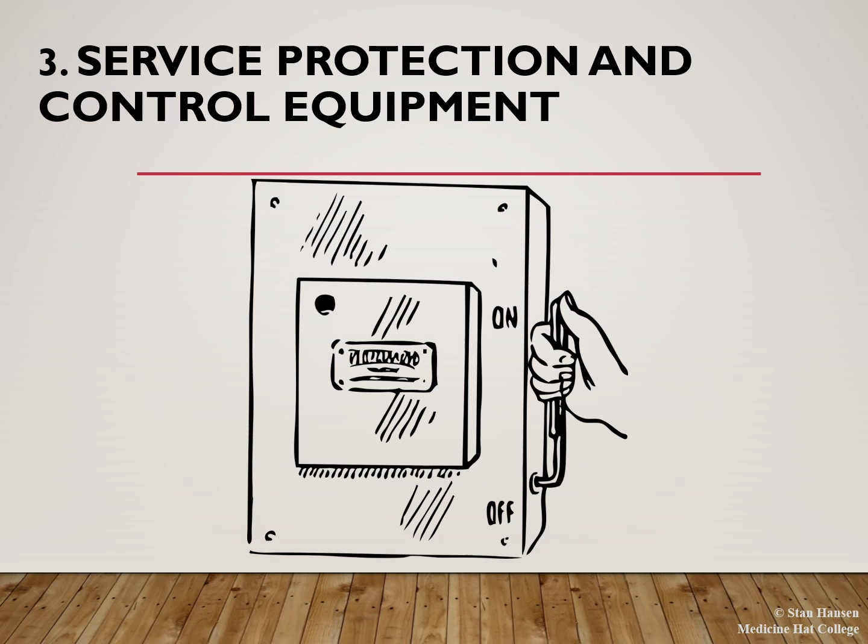Where we place our service equipment is very important because we need to be able to work on it comfortably and safely, and we need to make sure that there's enough access to be able to get to it. So there's a few different rules we have to look at. First of all, let's look at Rule 6-206, which states that wherever we put our equipment has to be approved by the supply authority. So whoever is supplying the power to the building has a say on where we put our equipment. Rule 2-26 also states that the inspector has power of rejection if they're not happy.

So not only do we need to make sure that the supply authority is happy, we need to make sure the inspection department is happy as well. Normally, this is achieved when we submit our drawings into the city or the supply authority for approval in the first place. A few other things we need to think about is it must be readily accessible. It has to be located as close as practicable to where the conductor enters the building.

Standata actually limits the length of the service conductor to 3 meters from where it enters the building to where it enters the service box. If we can't make that happen, we can go up to 7.5 meters, but then we have to protect it with rigid steel conduit. Some of the other undesirable locations to think about are things like closets, bathrooms, stairwells, or anything else that's considered to be dangerous or hazardous locations. So think about it this way. If you don't want to work there, don't put the panel there.

We also need to make sure that if any rooms are going to be hotter than 30-degree ambient temperature, that's not a good place for service equipment and it's not allowed. Also be aware of the flood zones inside your city because that changes how we install our service boxes as well.

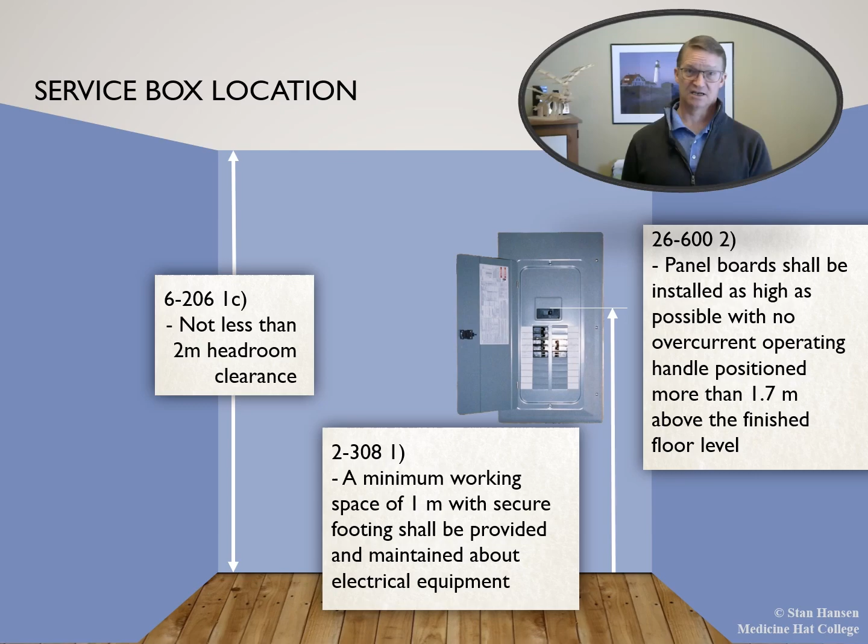Let's take a closer look at Rule 6-206, Subrule 1(v), which states that we cannot locate our service box in any areas that are below the floodplain elevation. Places like Medicine Hat tend to flood every once in a while, and the City of Medicine Hat actually has a flood elevation map available on their website that tells you what the elevation of that flood zone is going to be. We have to make sure that wherever our service boxes go are not below that floodplain elevation.

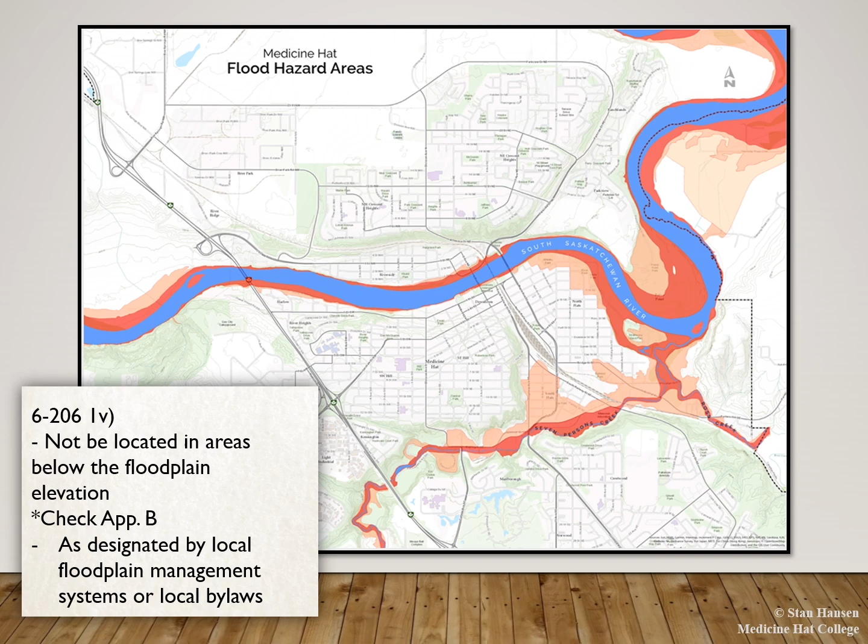What we can typically do is use a combination meter base. This will have the meter base on top and a service box directly below it, and we can mount this on the exterior of the building to make sure that our service box is not below the floodplain elevation. This way, in case of a flood, we can easily turn off the service box without having to go into the basement and risk ourselves.

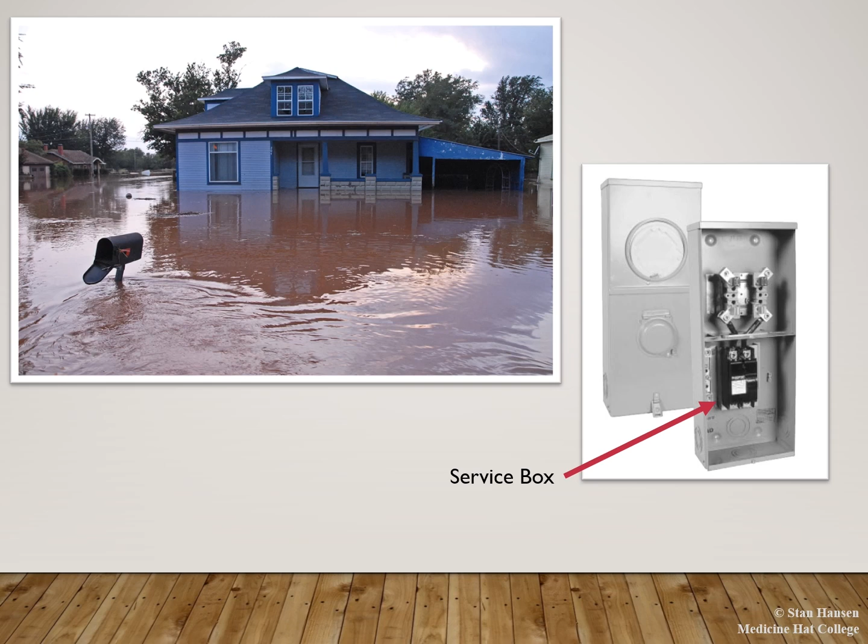When it comes to the rating of our service equipment, we have to be aware of a couple different things. First of all, we already discussed how to use Rule 8-200 to size our service conductor, and then we use our service conductor ampacity to select our overcurrent device. We would also be using our service conductor ampacity to select our service equipment ratings.

When it comes to a combination panel board, the bus bars inside that panel board are considered to be an extension of the consumer service conductors. So therefore, their ampacity cannot be any less than the ampacity of the conductors themselves. It's interesting to note that most 100 amp panels have bus bars that are rated at 125 amps in order to facilitate this rule.

Now that we looked at where we can place our service equipment, we're going to look at two different styles of services and what rules affect them. Overhead services are supplied from a transformer mounted on a pole, and the supply service will go through the air to connect to the consumer service. There are times where we can transition from a pole service to an underground service, but it's not always feasible and it's usually an extra cost.

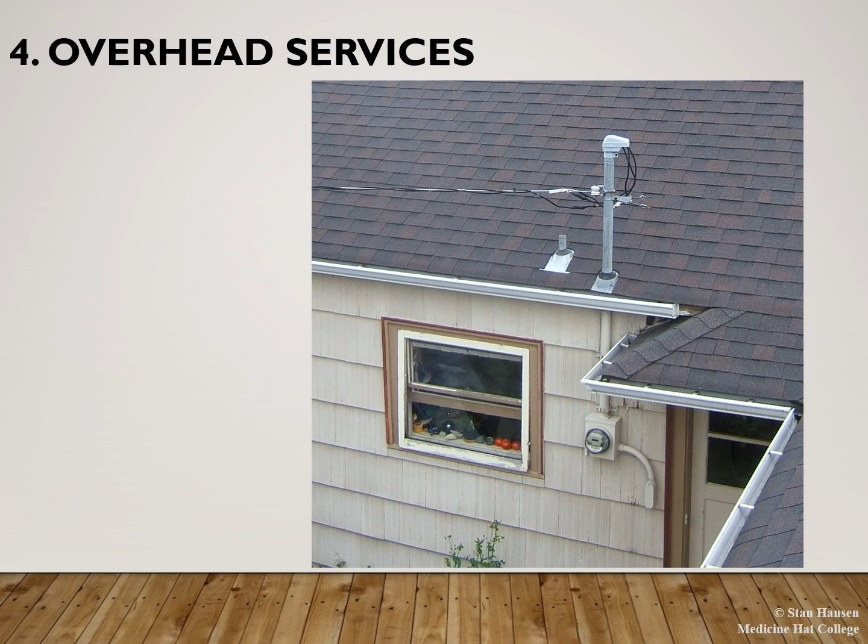The main concern that we have with an overhead service is maintaining a safe clearance for the conductors. We have to pay attention to Rule 6-112 Sub-Rule 2, which gives us some of the rules based on where to put the point of attachment compared to where we're going to put the service head.

6-112 states that the service conductors shall be attached to the building on the same side as where the service head is. So we can't be mounting it around the corner in case of an unmasted service. We also have to make sure that it is placed in such a way that the service conductors will run away from the building on an angle. So we cannot go over the corner of a building. And once again, it must be in compliance with the supply authority.

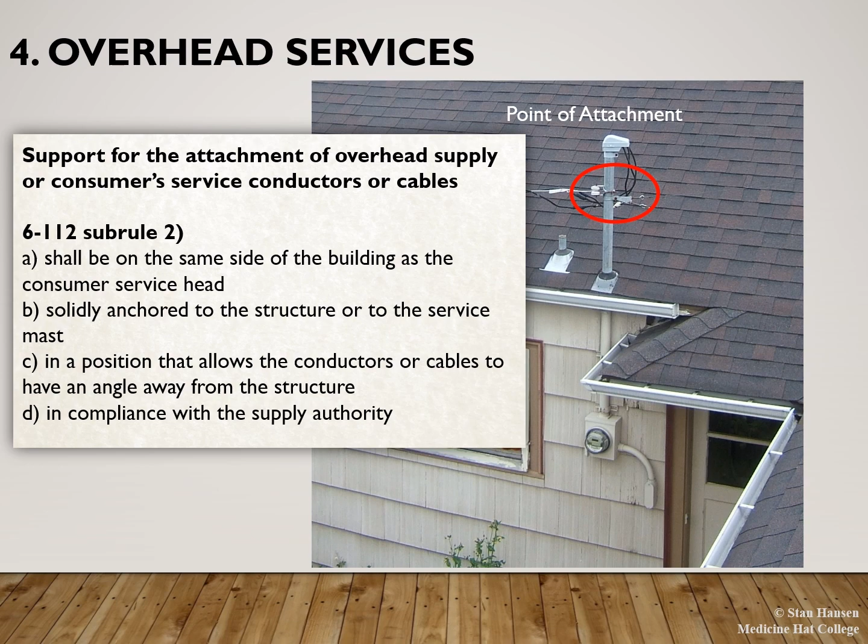Sub-Rule 3 deals with how much clearance we need to have between the cables themselves and the ground. And this all depends on what is going underneath the cables. So depending on what kind of vehicular traffic we have or what kind of obstacles could be found underneath it, it will change how much room that we need to have for clearance.

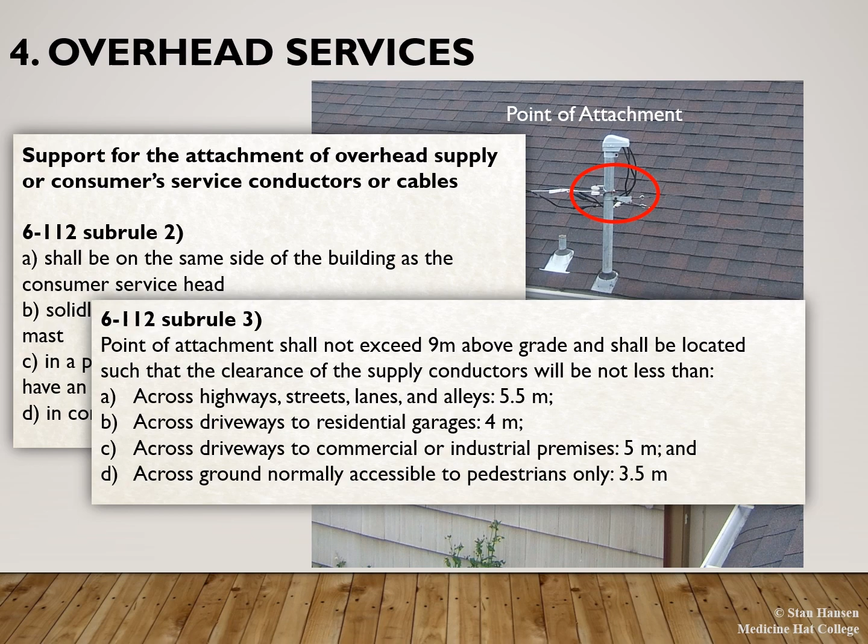For example, for highways, streets, and alleys, that's the most clearance we're going to need at 5.5 meters, whereas a pedestrian walkway would need the least amount of clearance at 3.5 meters. So depending on what your service is going to go over will change the amount of room that's required between the ground and the conductors themselves. These measurements all affect how high the point of attachment needs to be from the ground.

There's two types of overhead services that we can do. And the first type is called a masted service. We would use a masted service in case our service raceway ever has to go through a roof in order to meet the height requirements of Rule 6-112 Sub-Rule 3. The code book states that the raceway that we use in this condition must be rigid steel conduit of at least trade size 63.

The reason that we want to use rigid steel conduit is because we want to have that physical strength so that it can hold not only the weight of the conductors themselves, but any forces or load that are put on those conductors. The STANDATA allows us to use smaller than trade size 63 depending on the conditions of the installation. Remember that STANDATA is only used in Alberta, and it's because of environmental conditions in Alberta being different than other places like Ontario that we can actually have a smaller conduit size.

So STANDATA states that depending on how high we are going from our point of attachment to our roof line will change the size of the requirements for our rigid steel conduit. The higher we go, the larger our conduit has to be.

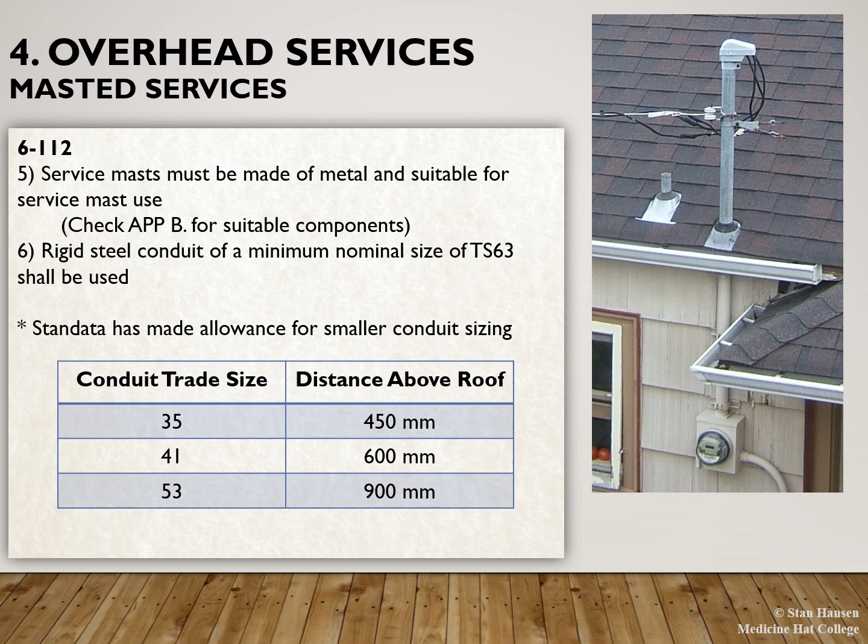We need to make sure that our masted services are solidly secured to the building. That means they have to be bolted through a piece of structure that's at least 38 millimeters thick. We could put in a 2x4 in order to support our mast, but that 2x4 must be part of the structure. We also need to make sure that we have 3 separate support clamps securing our mast: one right below the roof line, one right above the meter base, and then one between those 2 points. Make sure you're checking Appendix B on this rule to see all the different components that are required for a masted service.

The other type of overhead service that we have is an unmasted service. And this is where the height requirements do not require us to go through a roof line. We can bolt everything directly to the side of the wall of the building itself. This changes how we do a few things. First of all, our point of attachment is now going to be directly to the structure and not to our raceway like it was with our masted service.

Secondly, our raceway has more options. Instead of using a rigid steel conduit, we can use whatever we need as long as it provides mechanical protection for our conductors. We can use PVC, we can use TECK cable, we can even use an EMT as long as it's rated for our area. Rule 6-306 also states that we need to have a minimum raceway size of trade size 21, which is a 3/4 inch conduit. This is because we don't need to worry about holding up that extra weight of the conductors because now that's being held by the structure itself.

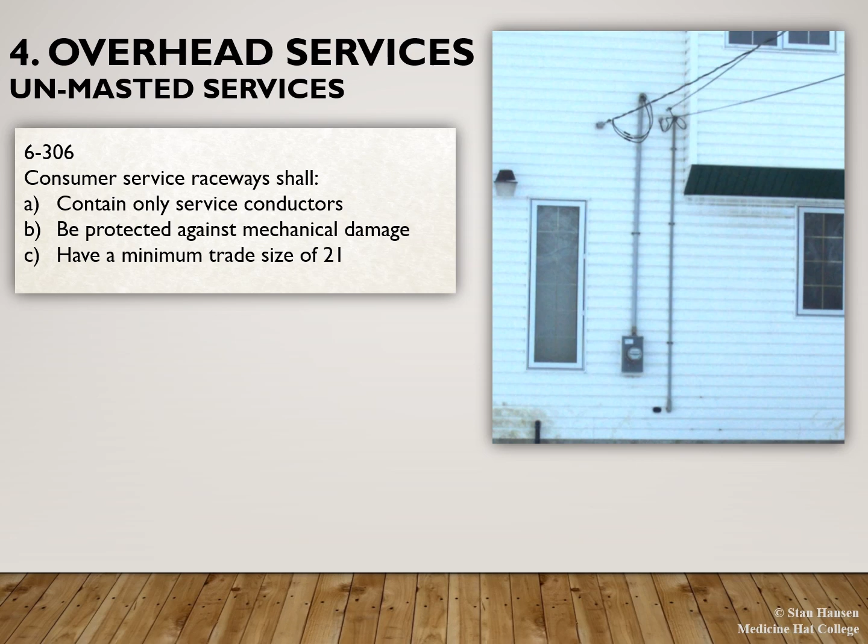When it comes to the service head on an overhead service, there's a few different rules we need to be aware of. Check out Rule 6-114. It states that the supply end of the consumer service shall be equipped with a service head that is suitable for use in a wet location. The weather head is installed to make sure that there's no water that can get into our meter base due to rain or snow. Rule 6-114 Subrule 4 also states that each conductor of a separate polarity needs to go through their own hole. So the weather heads actually have a bushing cover with knockouts in it. In the case of a residential service, we would knock out 3 of the knockouts in order to facilitate 1 conductor per hole.

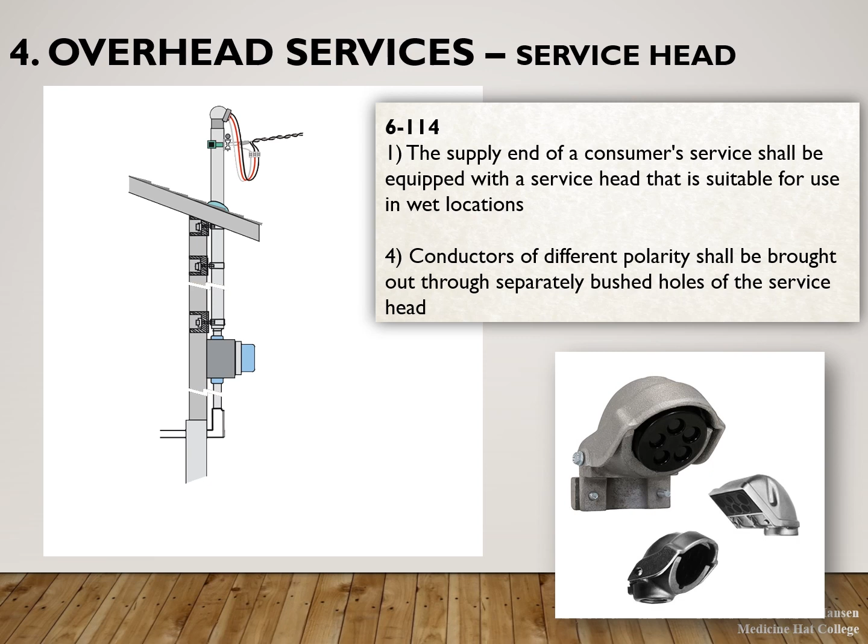Rule 6-116 deals with how far away the point of attachment can be from the weather head. It states that it must be within 150 millimeters to 300 millimeters vertically to the weather head. That makes sure that the point of attachment is below the weather head, not above it, and we can't be too close and we can't be too far. The other thing this rule states is that we cannot be too far side to side from our service head either. So our point of attachment cannot be any further than 600 millimeters left to right of the service head as well. So if we're going to go with an unmasted service where we are attaching the point of attachment to the wall, we have to make sure that we're not too far away from the service head.

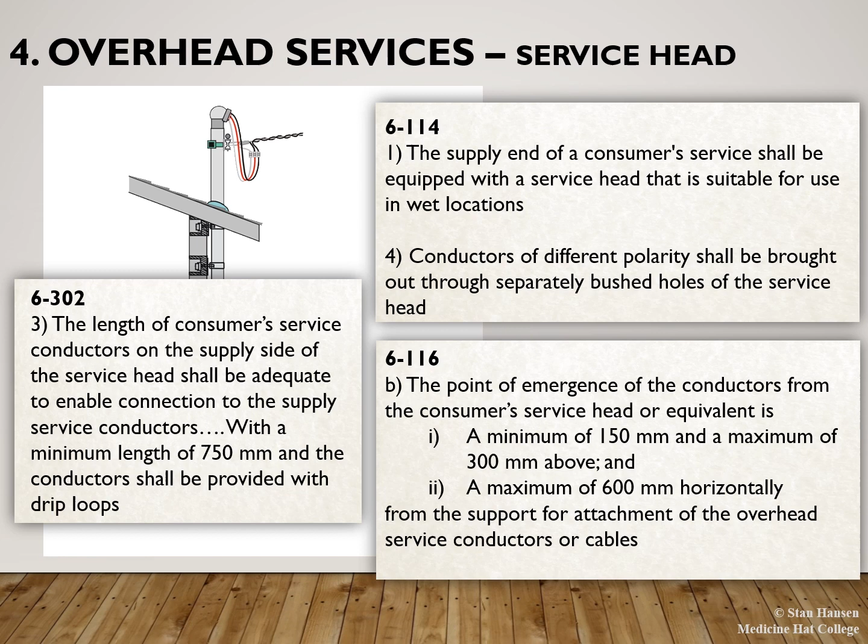Lastly, Rule 6-302 states that we need to leave at least 750 millimeters of wire coming out of the service head as well. This is for two reasons. First of all, we want to make sure that we have enough wire there to facilitate a connection from the supply authority. And secondly, we want to make sure that there's enough wire there that we can put in drip loops. We want to make sure that in the case of driving wind and rain, any water comes down and drops off the drip loop rather than being forced up and into the weatherhead.

The last thing we need to think about as far as clearances are concerned is Rule 6-112, which states that we need to make sure there's at least a meter of clearance between any access points such as doors, windows, movable awnings and signs, or decks and patios so that no one can accidentally hit the service conductors.

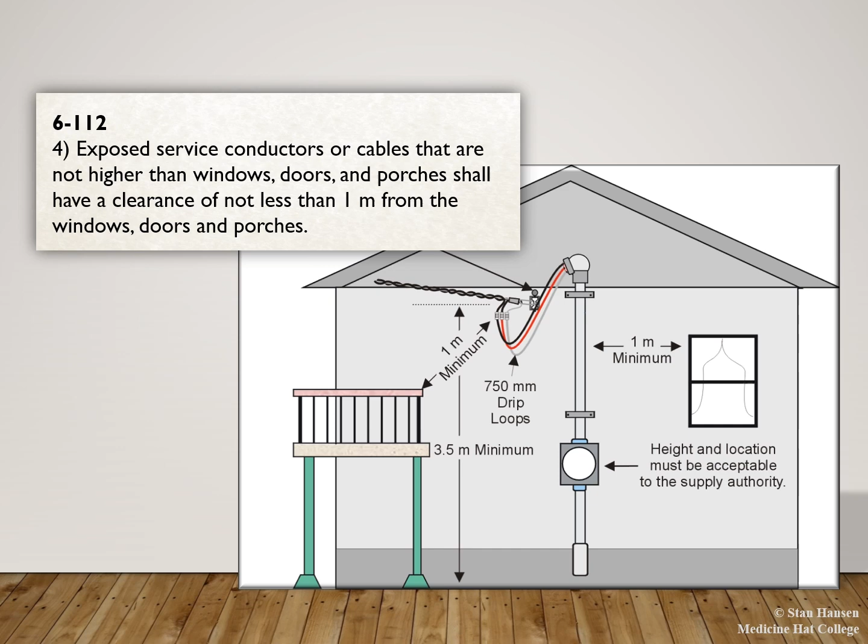Now that we looked at overhead services, let's look at the other option. The other option we have is an underground service. Underground services are preferred for a number of different reasons. They need less maintenance because they're not exposed to the elements. They're generally safer because no one's going to accidentally run into them. And they're cleaner looking, so we don't have to look at a lot of overhead conductors.

Our underground services need to look at two different areas within the codebook. First of all, Section 6, specifically for our service conductors, and also Section 12 for any type of underground installations. Rule 6-300 states that underground service conductors must either be installed in a rigid PVC conduit or they must be of an approved cable as per Table 19.

This is going to be either a TECK cable or a USEB cable. Rule 12-012 also specifies other requirements for underground installations, and states that direct buried cables must meet the depth requirements of Table 53. Table 53 looks at different requirements based on different conditions.

The two different requirements that we need to know to use this table are what our voltage is going to be and what kind of conditions are over top of our underground line. The difference is for vehicular areas or non-vehicular areas. So things like driveways and alleyways would have a deeper burial depth than any pedestrian walkways would. The reason for this is there's a lot more ground pressure because of the vehicles, which could potentially damage our cables. Table 53 lets us know how deep our cables have to be.

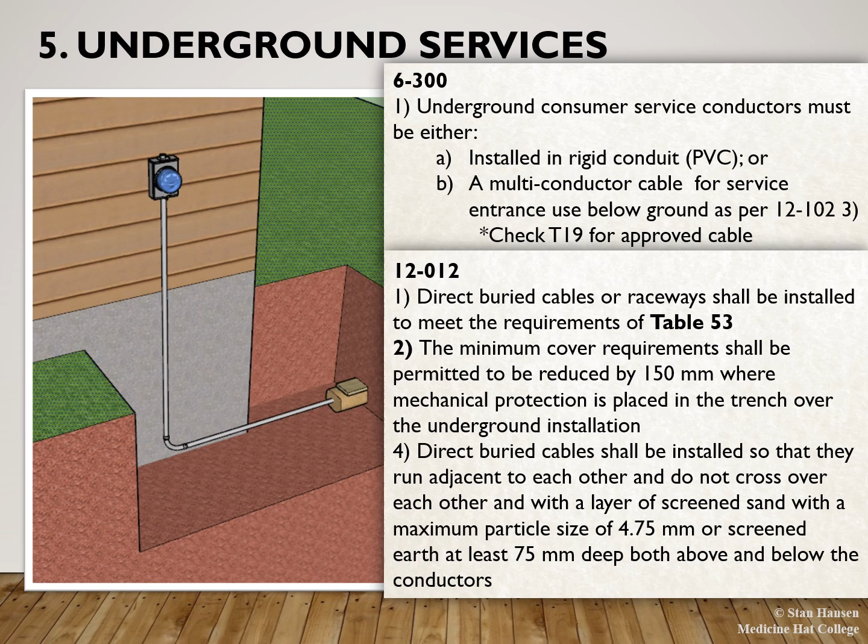The last thing we need to notice is that all of our underground conductors must be surrounded by sand. We need to have at least 75 millimeters of sand below and above our cables in order to make sure that our cables are not subject to any damage from sharp rocks or anything else that may be left in the trench.

There's two other things we need to know about our underground service raceways. First of all, they must be provided with adequate drainage, so if water does get into the conduit, it also has a chance to get out of the conduit as well. The second thing is, anytime that we come up and into a house, we have to protect the house from any underground gases that might be traveling along with our raceway. So we are to use a sealant material such as duct seal to make sure that we prevent any gases from getting into the building.

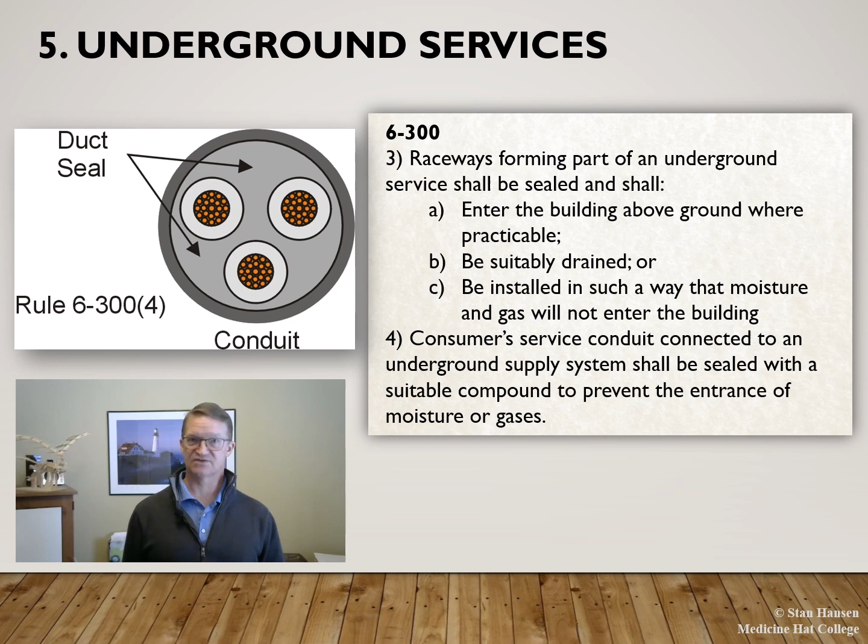We don't care about things getting out of the building. We don't want any underground gases getting into the building. Whether we are running a single cable or multiple conductors, we need to make sure that all the gaps and spaces around and between the conductors are filled completely to stop any gases from getting in.

Rule 6-206 states that any service equipment needs to be placed as close as practicable to the service entry point, but that's not always possible. If, for example, we have a panel that's in the middle of our basement and exceeds the 3-meter rule that STANDATA allows us, we can run it either underneath the basement slab or inside a crawl space, as long as we meet the conditions of Rule 6-208.

Rule 6-208 states that if we're going to run it underneath a slab, then our raceway needs to be fully encased in concrete, 50 millimeters on all sides. Or we direct bury it in accordance with Rule 6-300 and make sure there's at least 2 inches of concrete on top of it.

Our other option is to run it inside a crawl space. However, that crawl space must be no greater than 1.8 meters. It cannot be of combustible construction, so no wood construction, and it cannot be used for storage of any combustible items. So be aware of those rules anytime that you need to come into the center of a building.